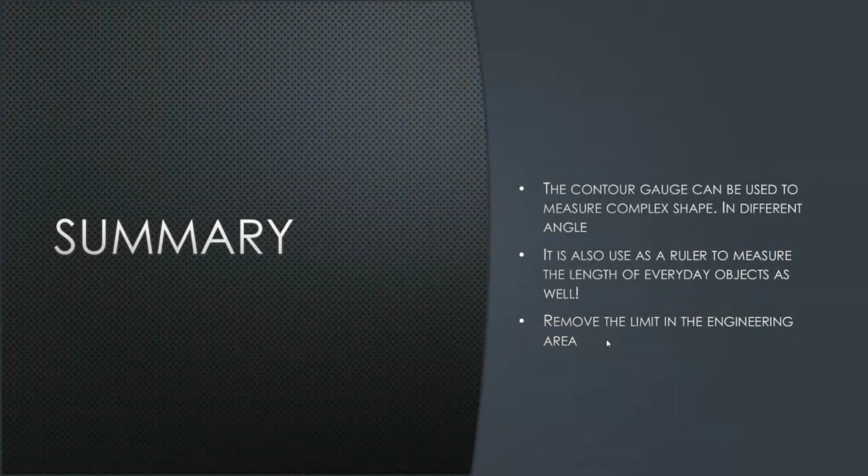Now it's the mind map. Here's the mind map we did as a pre-design for our model of the profile copier or contour gauge. As you can see, we have the size which we talked about in the description and its functionality. We also designed it with a really low budget of only $30, which means you can find it convenient not only to buy one but also to make one.

It has a safety lock to keep the pins in place, so the safety part is taken care of. The functionality we already talked about, and also the materials vary - it can be either plastic, wood, or metal.

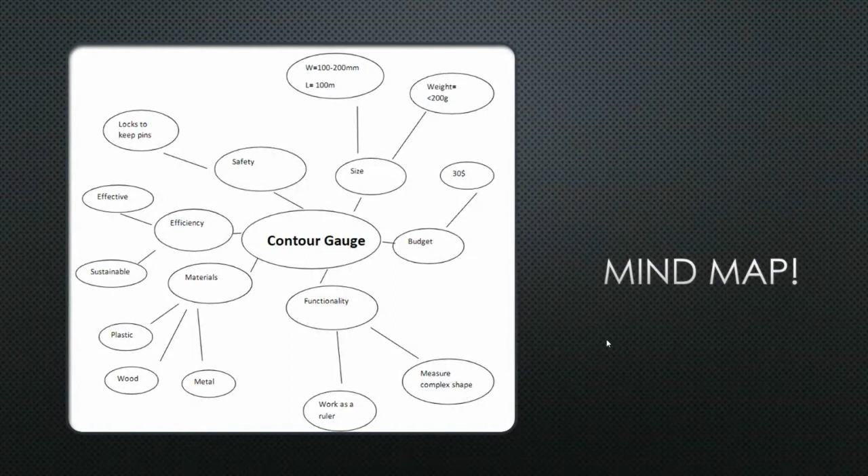Here is our project requirement. For our profile gauge, we must have a working width of 100 to 200 millimeters to make it very convenient for the customers. It must have a lock feature for safety purposes. Moreover, the pin's length must be 100 millimeters, and it must not be flexible, so it can keep the pins very tightly.

It must have at least 5 pins per 10 millimeters for our design. As for its lifetime, it should last at least 10 years, since it is very useful, and we try to make it last as long as possible. For this type of tool used on a daily basis, it should be straightforward and not require any manual. The weight, as we discussed, should be below 200 grams.

It must be made with ethically sourced parts, and the pins must be offset from the floor by no less than 5 millimeters. It must also be fairly simple to manufacture.

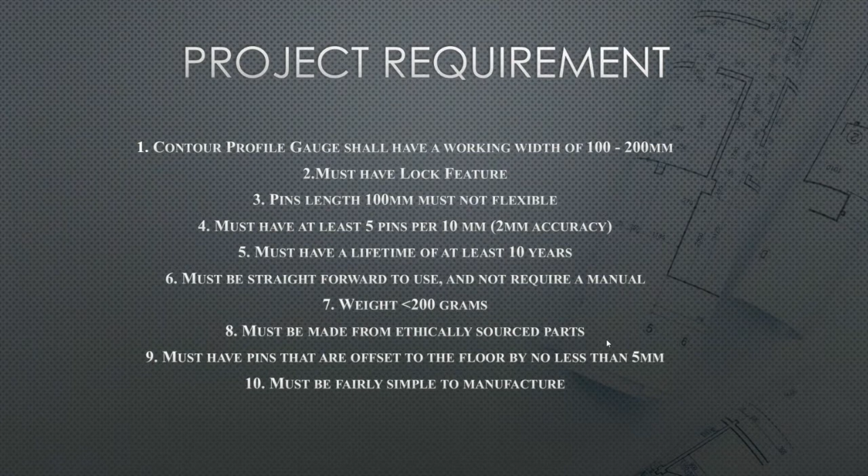Now it comes to our minute meeting. We're going to talk about what we did during our meetings. First, we discussed all of the pre-presentation stuff like the minute meeting, the front cover, and the mind map, so we could kickstart our design and assignments. Secondly, we discussed the needs and specifications, which was probably one of the most important meetings because I find it really useful for our assignments.

Thirdly, we did a work breakdown structure and the Gantt chart. We talked about who would do the main task, which is the design, and discussed the Gantt chart, which Nik handled very nicely. We also discussed the QFD and created a OneDrive PowerPoint slide. This is how we came to this presentation today.

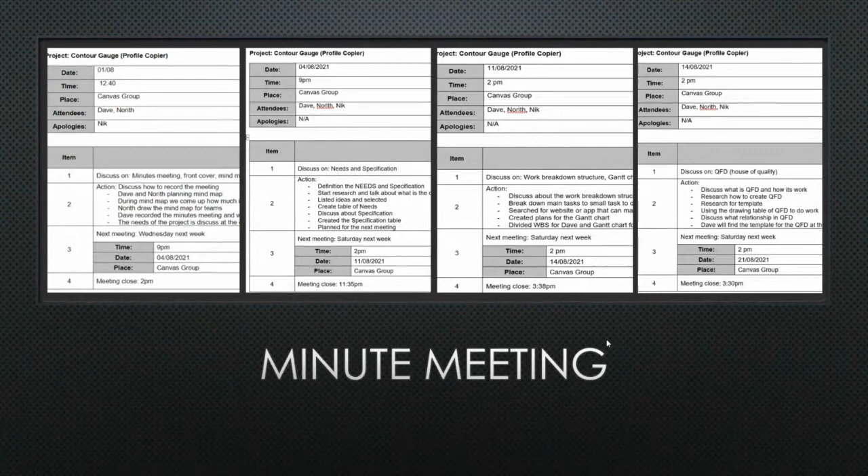So starting with our needs for the project, we have a list of 9, along with our expectations for each and the rating that we gave it. For the cost of material, we believe it's affordable as it's not the most expensive material available to us, but also not something that can be easily damaged.

With the material of product, we're using materials that are reliable and the best choice for a profile copier. With the size, it's a decent size for a profile copier, but one could argue that for some objects it could be either too small or too big.

With the weight, we expect it to be under 200 grams, and considering the different objects it could be used for, we believe the lighter it is, the better it is. For durability, as I said, it could be used for a long period of time.

For functional, it can easily measure complex shapes due to its design, and can also measure objects with the ruler built into it. It does have a lot of variety in its features, such as a ruler and a locking system. However, we could add additional equipment if needed.

Similarly, with mechanics, the locking mechanism isn't vastly complicated, however also not super easy to use, and with the warranty, it can be used for some time, but we can't guarantee exact dates for it.

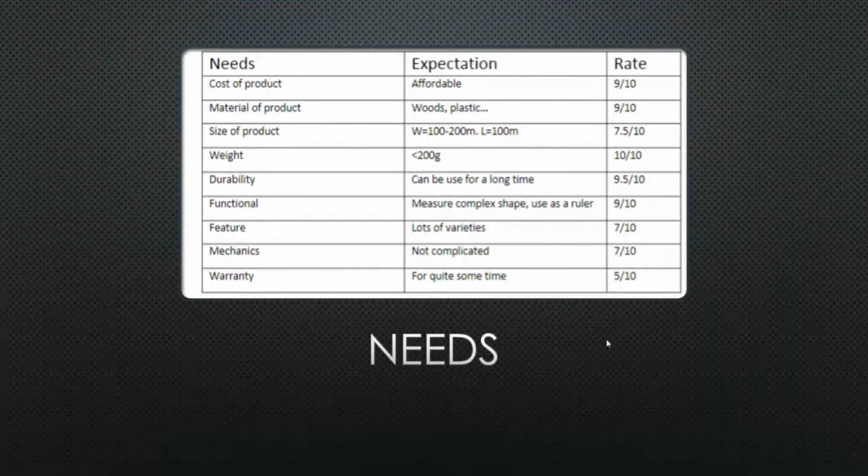For the specification table, we focused on 5 topics that we can adjust for our project, including measurements, mimic as a ruler, durability, measure complex shapes, and safety.

For every topic, we agreed all topics are required and not optional. We also agreed each topic is valued and that we require 1 unit for each. Finally, we had given an acceptance test or method for each topic.

For measurement, we would measure the tools with tools given to us. To test the ruler, we would draw a straight line to test its accuracy. For durability, we would do a simple drop test to check for damage.

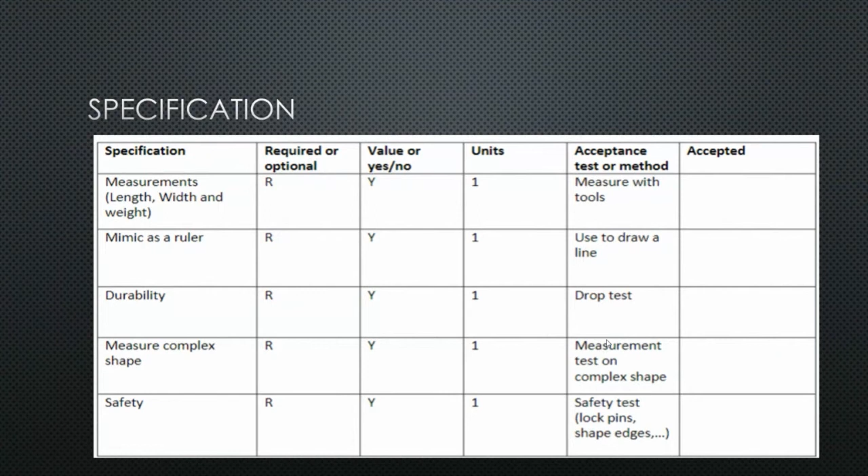For the complex shapes, we would perform a measurement test on complex shapes to understand how accurately the profile copier can copy the shape. And for safety, we would perform a safety test with items such as the lock pins and sharp edges to determine how safe it is.

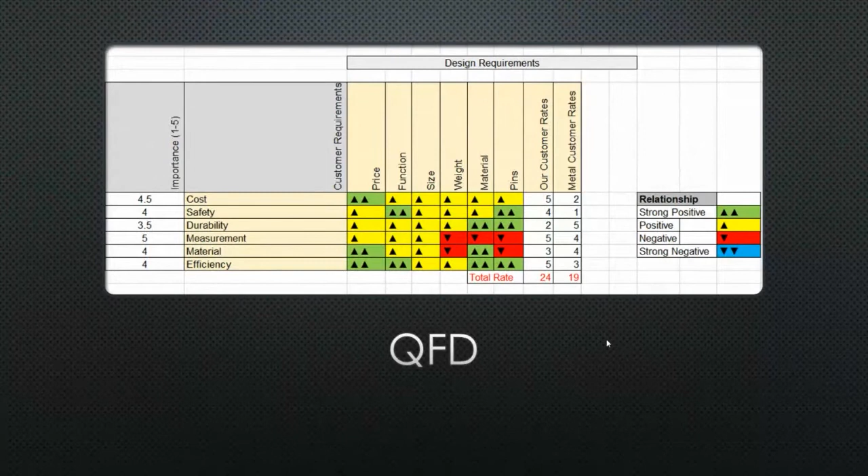Thank you. This is the QFD. So we've plotted a list of customer requirements as well as the design requirements to illustrate the relationship between the two. To make it easier, we have color-coded each relationship. We have also added the level of importance for each customer requirement on a scale of 1 to 5. And as you can see, there's only 5 negatives that we have plotted there.

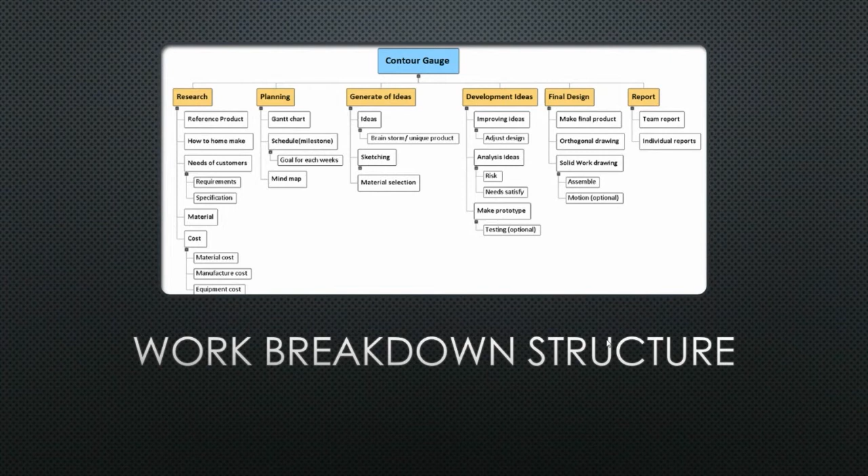Product, basically. To conclude our PowerPoint, I'll hand over to Dave.

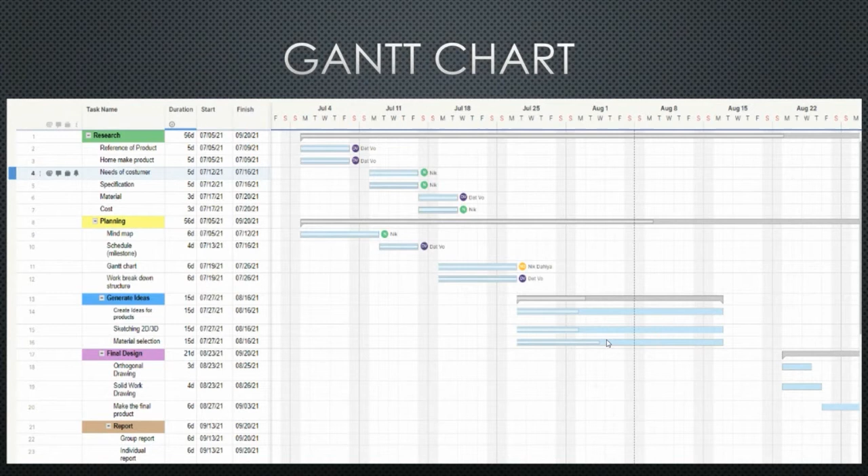Thank you, Nick. So for the next phase of our project is the generation of idea, where we brainstorm, sketch, and analysis our ideas and choose one of them as our final design.

As you can see, this product is already perfect on the market nowadays, and there's nothing much we can change. So we just change the outlook and some of the functionality of it.

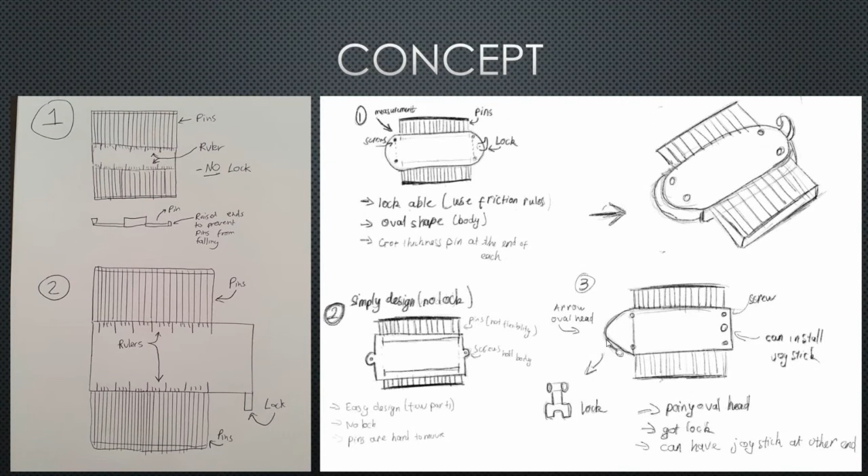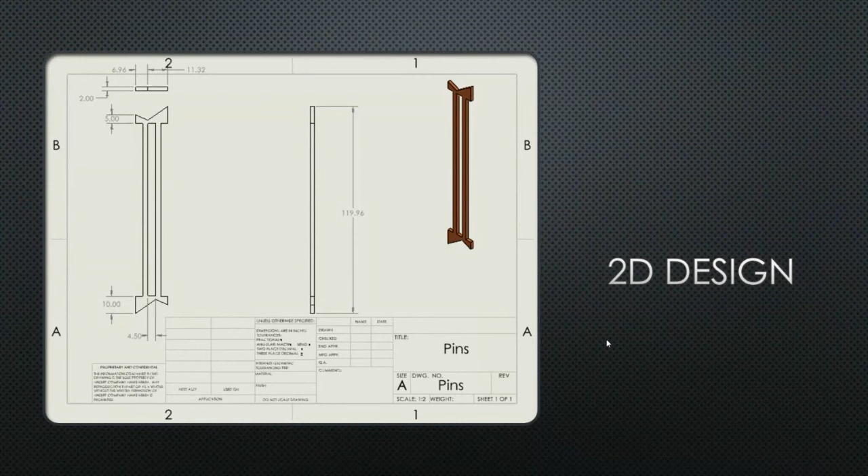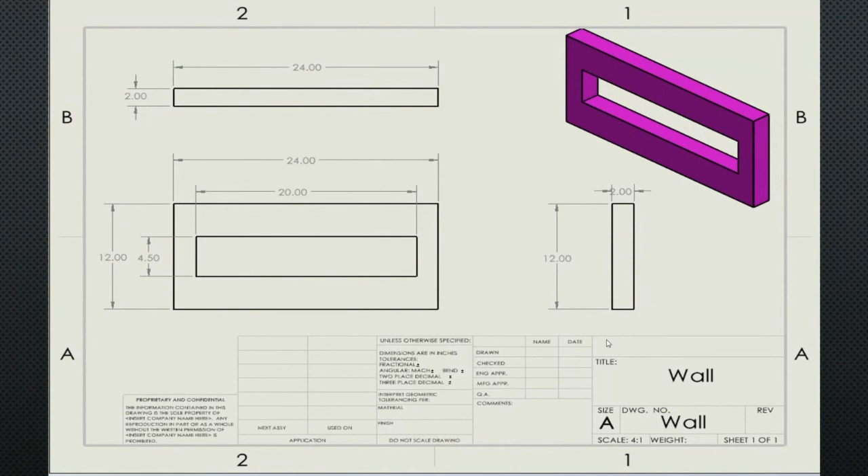For the second part, a pin holder. Its purpose is just to keep the pin from falling, in a length of 100 mm. The third part is just a wall which prevents the pin from sliding to a side and keeps the pins in the middle. There are two walls for each side at the end of the pin holder.

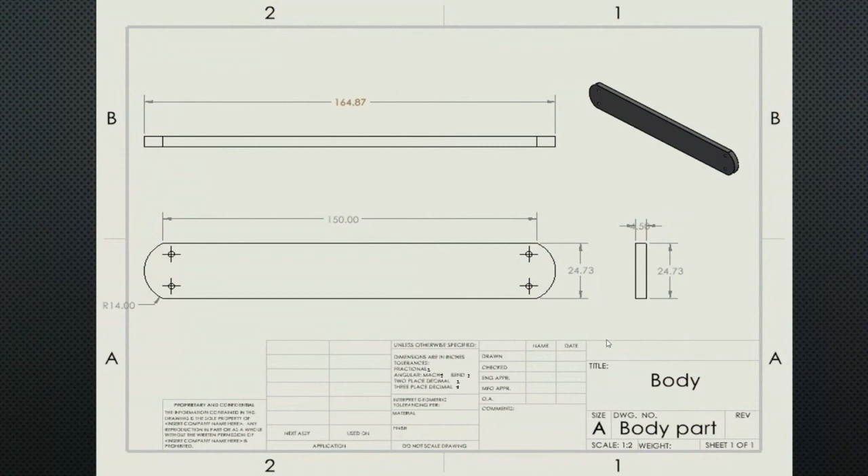The fourth one is simply the body, which should cover the other parts inside. It has a round edge to prevent scratch or injury to the user when they use the product, like by using force to push it or carrying it around - they will not get injured. Furthermore, it also makes the product look neat and unique.

Finally, the important part is the lock design, which will keep the pins stable after the user measures or replicates the object.

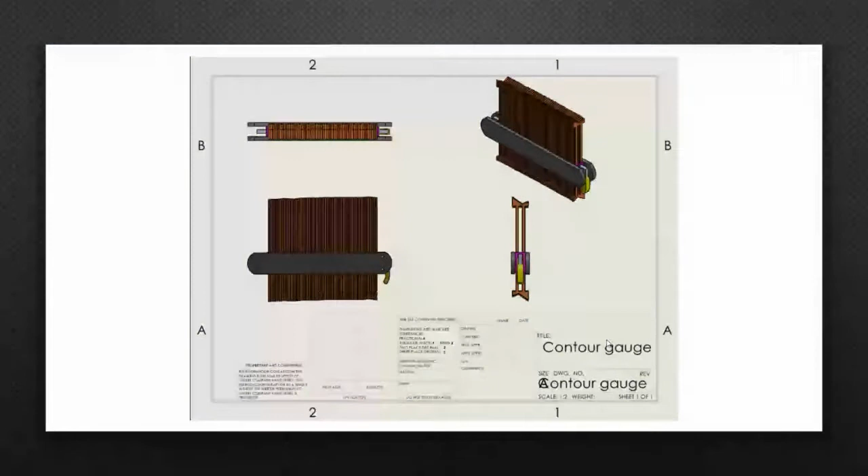Here is the 3D model of it. I made it in orthogonal view, so you guys can have a different point of view of it, such as top view, side view, and front view. And here is another look at how it looks.

For the final one, this crop just wants to explain how the lock function works. As you can see, between the pins there is still space, but a little space. So when you rotate the lock, it will compress the wall, and the wall will compress the pins to a side. It will make the gap between all the pins closer, and apply the friction rule. The pins will be stable after the user measures it.

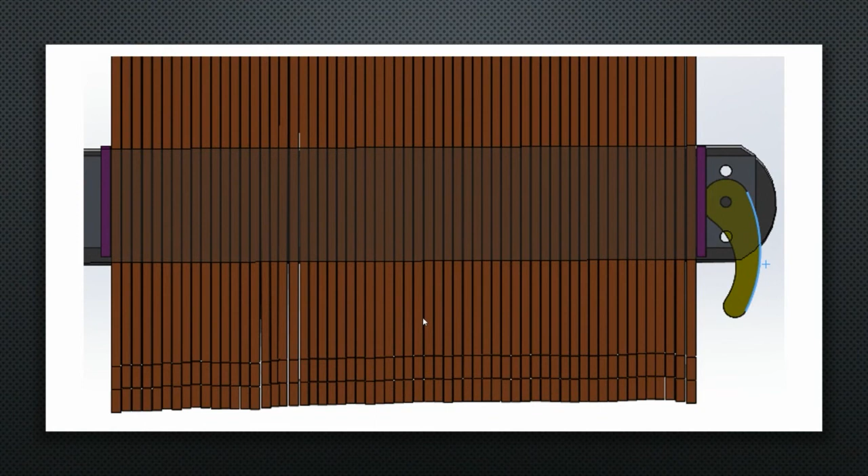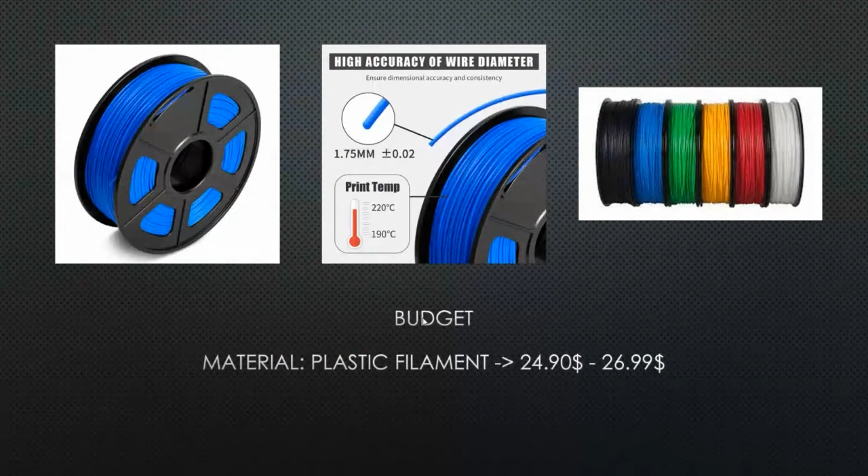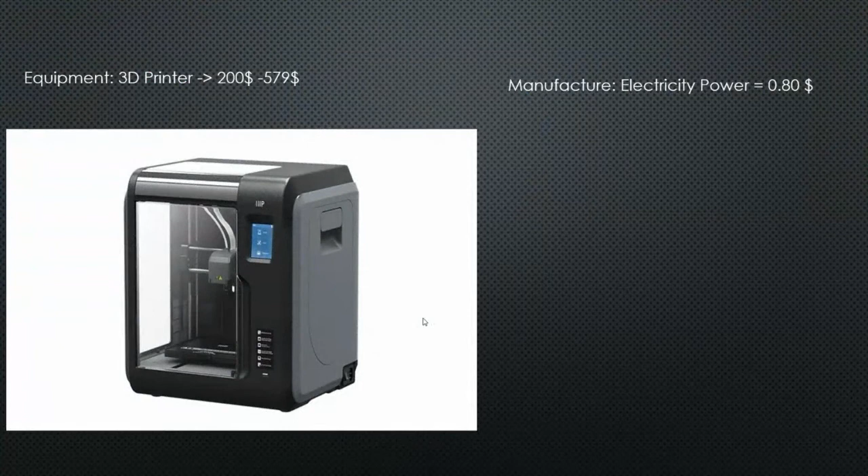Finally, for the budget - according to the school assignment, we will not cost anything at all, but for the real product, we will have to cost like $24.90 to $26.99 to get some material such as plastic, which is the cheapest one, I believe. For the equipment, we have to get a printer machine, and to produce the product we only need to use electricity power, based on my research, which is 80 cents for 1 kilowatt. Overall, the minimum cost for us to do the product is $225.70.

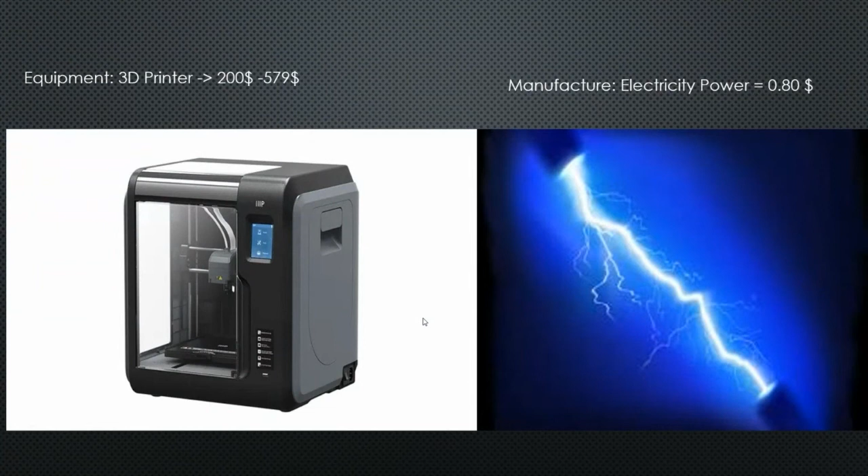After this project, we can see that our time management is pretty poor. The deadline tasks were completed pretty late, and though we started the task early, we struggled and had difficulty doing the SolidWorks part since we're not good at it. However, we had good communication as a team, sharing ideas and understanding each other, covering each part to make the whole presentation today. Well, thank you for listening.

If you have any question, just ask.

Thanks very much. That was a very nice design, very nice thinking, and nice implementation. We really enjoyed every aspect of it. Please join me in giving a clap to the presenter. Well done, well done, you did a very good job. Thank you, thank you, that was great. So, with great presentation comes great questions. So don't lose your chance of asking these genius people how they did it. All right, this is your chance. Ask them before they disappear. You would regret it.